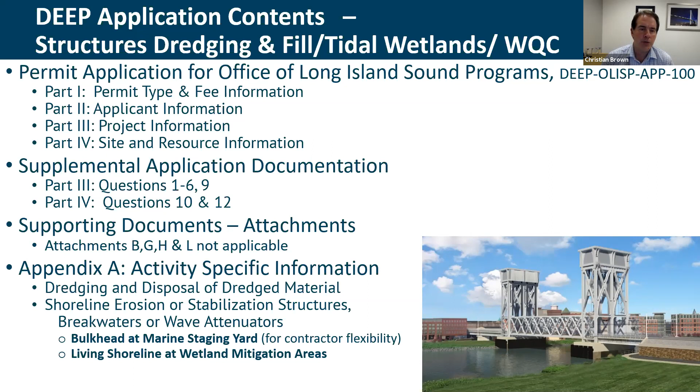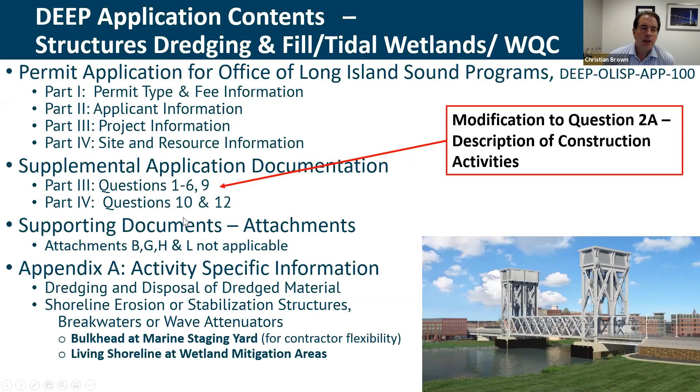What we're going to focus on tonight really is in this area here. That's where the primary adjustment to the application is made, in what we call the narrative, where we describe the nature of the work, durations, the type of construction work that goes on in order to build the new Walk Bridge. So within that part of the application, we are modifying primarily question 2A, and that's the description of the construction activities. So it's been a while since we've seen some of the specific construction activities, but if you remember from previous discussions, we broke the project down into what we call construction activities. And the construction activities describe those discrete operations that take place in order to build the new bridge and remove the existing bridge.

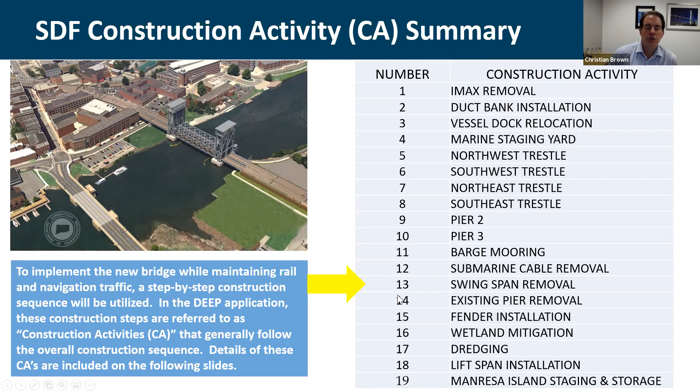What we also wanted to do within the application was to provide some additional clarity to some definitions and terms that we were using to define work that gets conducted within the waterway and within the navigation channel. And probably the best way to describe that is if we just walk through each one of those scenarios so that everybody has a clear understanding of what those definitions represent. So if we take a look at the existing bridge in this schematic here, looking to the north, when the swing span is in the closed position, there are 2 navigation channels that are provided. There's about 16 feet of vertical clearance above mean high water, and low clearance vessels can go through either side.

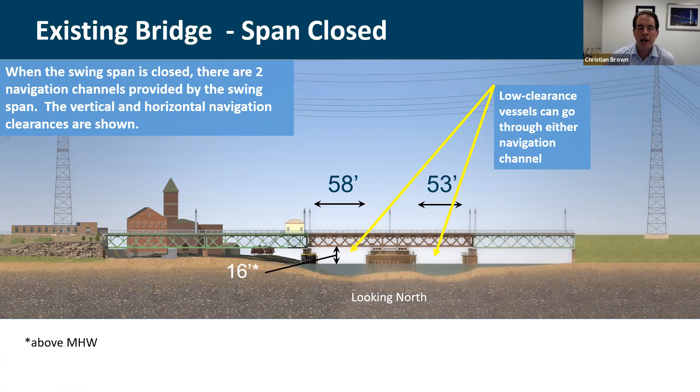You know, that includes small motorized craft, rowers, et cetera, that could pass beneath the bridge when the span is in the closed position. And then when the span's in the open position, as you see here, the navigation channels open up on either side. We still have 2 navigation channels, and now that vertical height restriction goes away, and that allows for taller height vessels to pass through.

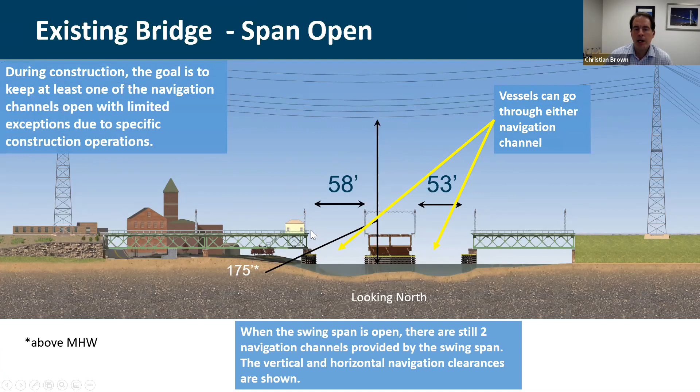Okay, so when work starts to advance for construction of the new bridge, one of the goals of the project is to maintain both rail traffic and waterway traffic to the greatest extent possible. And throughout the course of construction, there may be periods of time where we have to conduct activity within portions of the waterway that may impact one side of the pivot pier, okay? But again, that goal is to keep the navigation channel, at least one of them, open to the greatest extent possible.

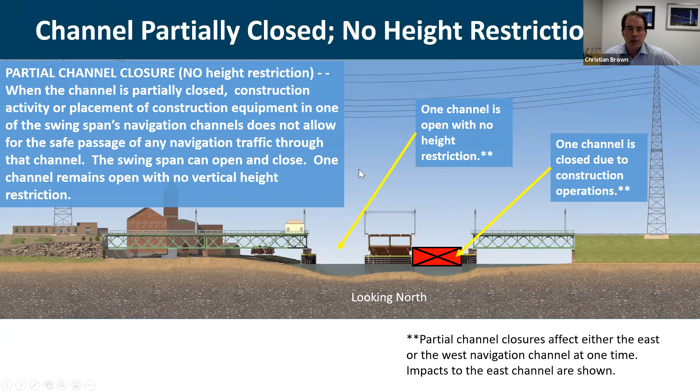And then finally, our last definition of how we are characterizing the navigation channel is when the channel is fully closed. Again, the goal is to have the channel open as much as possible. And there are identified instances where the channel has to be closed, where no vessels can pass. That's because there's a construction operation going on that poses a certain risk to the waterway users. Safety obviously is our number one priority, so we don't want to compromise that.

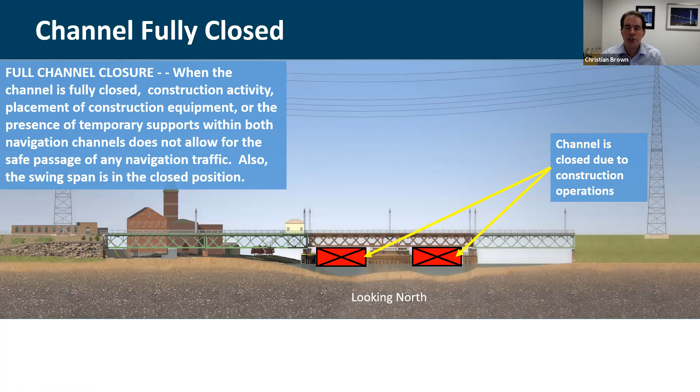Or there may be just a physical blockage of the channel from construction activity, construction equipment. There may be some temporary supports placed in the waterway as well. And so the channel would be closed in this instance. So that's the channel fully closed. So we've got channel fully open, the partial closure, and the full closure. Those are the definitions that we are working with.

And then to demonstrate that, we can use one of the construction activities where we build the piers. That's construction activities 9 and 10. We've got the piers on either side of the navigation channel. They're placed, if you remember, outside of the navigation channel, and it allows the swing span to remain operable during most of the early portions of construction.

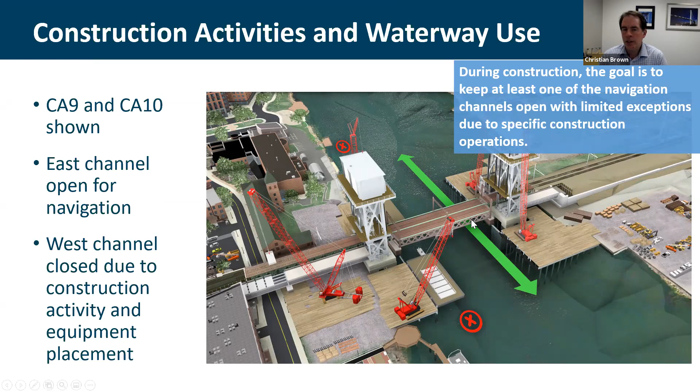So let's now get to construction activity number 13, and that is the existing swing span removal. You've probably heard us talk before about how wonderful that existing old swing span is, where it carries all 4 tracks, and it was really an engineering achievement more than 100 years ago.

Obviously they may not have been thinking about removing that span, because for the Walk Bridge project, that really complicates things. So as great as it has been over time, that 4 tracks being supported by a single structure really makes things challenging for us to progress the construction.

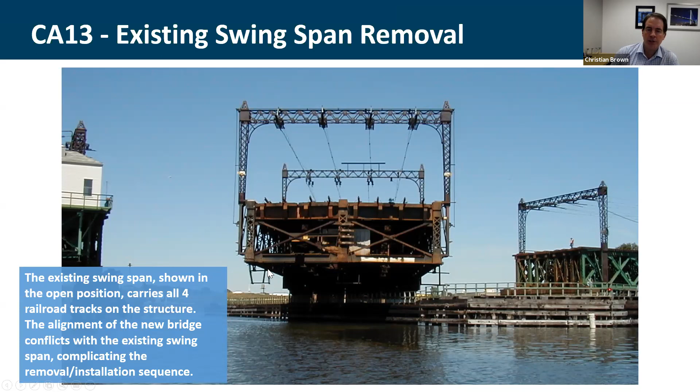If you take a look at the layout of the existing bridge, what makes it most challenging is that the layout of the new bridge is such that there's a physical conflict with the existing swing span and the new lift span to the south. So what we're doing here is looking to the east. This represents the existing pivot pier.

This represents the existing swing span. If we weren't to do anything with the existing swing span, you can see there's this overlap with the new south lift span truss. We can't change the track any more than what we have in order to meet design requirements and criteria. So we're faced with this conflict.

In the DEEP application, what we have is the presentation of two schemes that will provide contractor flexibility during construction to remove that existing swing span and to allow the new lift span to be installed.

So in scheme 1, under construction activity number 13, this is really the heart of the updates that are being finalized in the DEEP application that differ from what was filed back in early March.

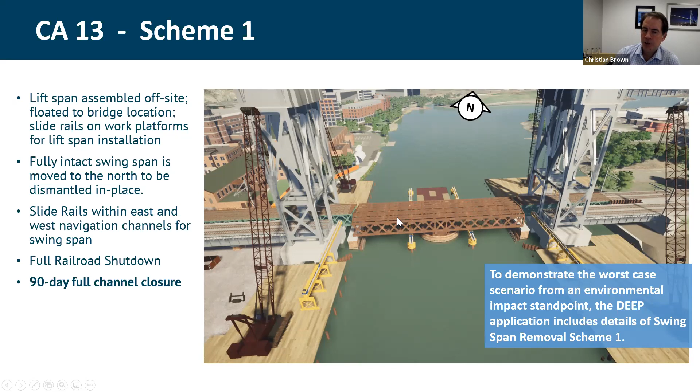So there's two things going on with this. It has a full railroad closure, and it also has a 90-day full channel closure, meaning that with the presence of these slide rails and the removal of the swing span from its current location, the channel gets closed for 90 days. That's scheme 1, as described in the updated DEEP application.

These next series of views just provide a little bit different perspective of how those slide rails appear. So we have the system within the waterway. We're closing the channel for 90 days while we're installing these slide rails, moving the swing span to the north, then removing the swing span from the site, and then pulling out the slide rails.

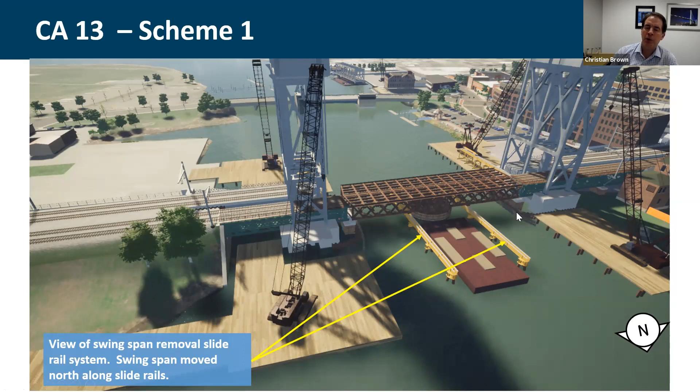That encompasses that 90-day time period. And here's the last perspective of scheme 1 with the temporary slide rail system.

How long will the railroad be closed for? The railroad will be closed for a minimum of 96 hours.

We're working through that now as it relates to better understanding what the overall testing requirements are going to be for Metro North in order to reopen the southern two tracks. But 96 hours is what we currently have, and there's a lot of risk with that operation. You're saying 90 days. On what timeline is it 90 days based on a year, 12 months? What months are you looking at?

Right, so that's a great question. Through our consultation with waterway users and other agencies, this work is planned to be performed. Overall, there's a window from November to April that this type of work could be planned. The intention is to actually conduct that 90-day period right in the middle of that, so in the December, January and February timeframe, where a lot of the recreational traffic is at a minimum, making accommodations for the commercial waterway users in this area as well. Their traffic tends to drop off compared to the rest of the calendar year, so we're really dedicated to completing this work during those winter months.

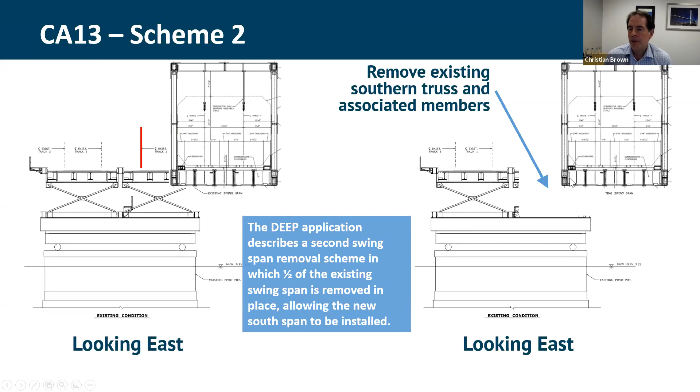So again, this is what that would look like. Over on the left-hand side, you see the conflict over here. And now when we remove part of that swing span, we got that physical space needed to install the lift span. So just like in scheme one, the new lift span is pre-assembled, it's built off-site and then floated into position. The south half of the existing swing span is removed in place.

So what we see in this diagram here is kind of a portion of that removal in place, right? So we'll be working on both sides of the channel in order to remove this. There are no temporary supports, no piles driven in the waterway, so no impacts to the river bottom during this work. It's all done above the mud line.

It allows for a continuous two-track operation. So on the north half of the bridge, those tracks are already in service, they're going to remain in service. I mentioned no temporary works in the waterway.

What happens when this operation commences is that the swing span is no longer operable now, so we essentially have a fixed bridge in a temporary condition. That temporary condition right now is scheduled for a 180-day period.

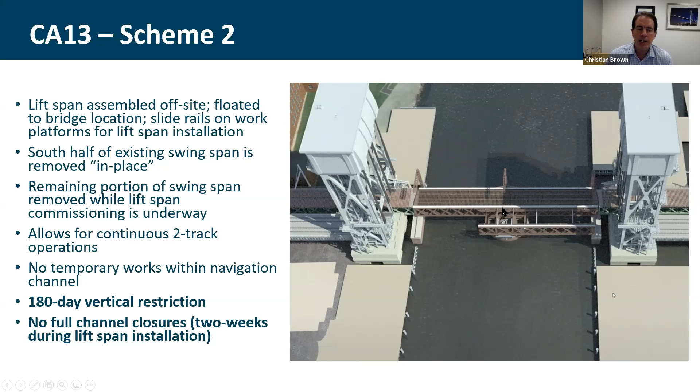So there is no blockage of the channel, so there's no full closure of the channel. We'll have partial channel closures. If you remember, the partial channel closure is when you can use one side of the bridge versus the other. Unlike in scheme one, where the channel is fully closed for 90 days, we have no full channel closures with this option, and we have no piles in the river itself, but we do have that 180-day vertical restriction.

So in this video here, I'm going to move it along a little bit just because it takes a little time to get to a point where we actually see stuff happening. As I mentioned, that work will be performed on one side of the navigation channel at a time, keeping the other side open, and we'll step through this a little bit so you can see how some of that work progresses.

And now we flipped over, now we flipped over to... well, whoops, I hit the wrong key, sorry about that.

Move this along. So now we're over on the west side open—I'm sorry, the east side is open. And now in this view, that gets back to that point about the alternating navigation channels that remain open.

Within the permit application, you'll also see reference to the fact that scheme 2 for the swing span removal is the department's preferred alternative. So the idea is that we're presenting both schemes in order to have approval and authorization to complete both of them, with the department's goal being to implement scheme number 2.

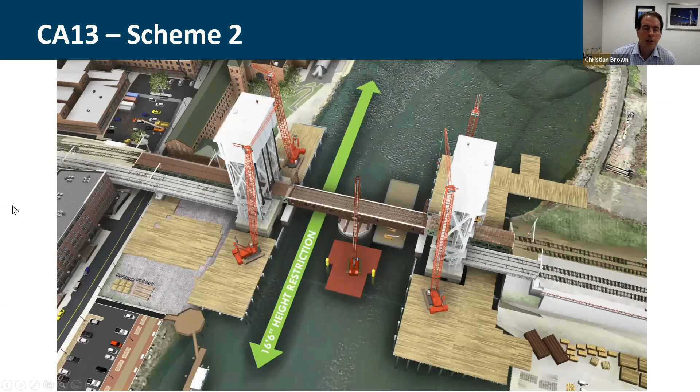That represents the primary update to the DEEP application. In terms of schedule, if we bridge the time from November 1st through April as that window when this work would happen, we met with upstream waterway users a couple weeks ago and presented this to get their feedback, and it was generally acknowledged that they could accommodate that off-peak time. It's a one-time occurrence within the project, and it's currently scheduled within the 4th year of the project.

So there's going to be a lot of communication, a lot of planning, understanding exactly when this is going to happen, close coordination with all stakeholders to ensure everyone is kept up to date and aware of the construction activity taking place—when one channel will be open, when the other channel will be closed, et cetera. So that's the overall schedule for the swing span removal.

Just to recap: scheme 1 has piles driven within the navigation channel, and those piles get extracted when the operation is completed. It has a 90-day full channel closure and full closure of rail service. Scheme number 2 has no full channel closure, except for the period when we actually have to install the lift span itself, but the swing span removal has no full channel closure. It has no railroad closure, and no piles installed within the waterway.

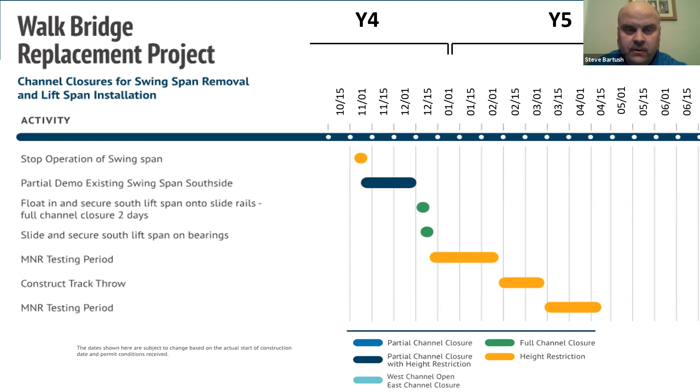Maybe one or two more from me. So it was mentioned in Harbor that there was going to be a low headroom tug used perhaps to transfer, I assume, private company materials. Can you guys talk about the logistics of that? Where's that come from? Who pays for it?

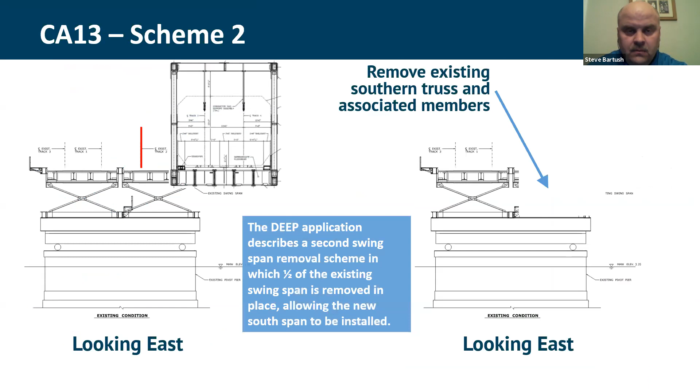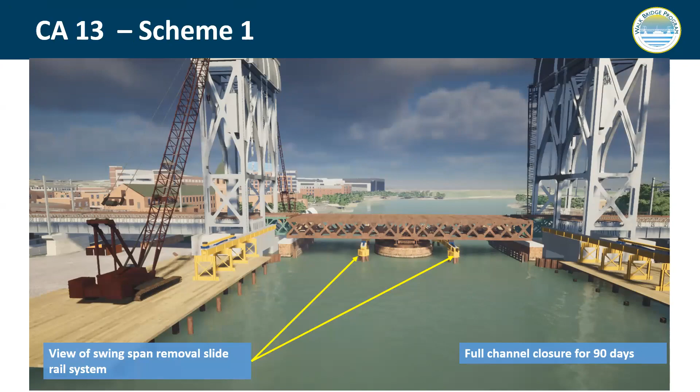Yeah, Rich, do you want to talk? I could talk a little bit. So just like it will be provided by the program. The handoff would be south of the Stroffolino Bridge, and the low headroom tug would push the barge all the way up to Devine Brothers, I believe is where they'd be going.

If there's another barge delivery to a different facility, it would be the same thing. They would hand off below the Stroffolino. Now this only occurs when the bridge is locked in position that one winter season. Other than that, the low headroom tug wouldn't be used. The contractor will still also have a low headroom tug on site as he's moving around barges that he needs to use to build the bridge, so that allows him to move his barges without having to worry about the bridge being open.

Thanks. I don't mean to be facetious, but when the low headroom tug is not in use, someone may want to cover it with camouflage netting. We have members of our community that think that might be the solution that would obviate the construction of the bridge in general. That doesn't help with the sailboats, Steve.

Are you still gonna use Donardo's property? Yes, John, you want to answer that one? Yes, we are, that's our staging area.

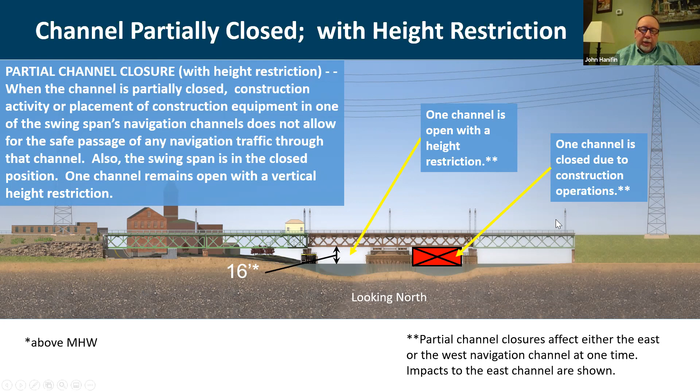And then the other question - I think at one point you talked about needing to moor or anchor work barges in the harbor or outer part of the harbor. Is that still part of your application? Yes, it is. We have the locations - do you remember the exact locations, Chris? We thought that if you use Manresa Island, that may be an opportunity to use the old barge terminal there instead of having to anchor or moor large barges in the harbor, but I don't recall that now.

I think the idea with the use of Manresa Island is that it has a specific construction purpose that's planned. It's already scheduled to be occupied, if you will, by construction barges where the lift spans will be assembled.

And then the other thing - you don't need any city land use approvals to use Manresa Island, you just need approval from the owner, and that's what you're working on now to come up with an agreement with NRG. We've gone through the public process. We'll submit our applications as part of our permit packages, and then our right-of-way unit will negotiate with the property owner.

So that's still in the works then. Yeah, until we get our permits submitted and approved, everything is waiting out there for approval. That's why we really want to get the applications in. We really want to get into construction because every day we wait is a delay, and delay costs, so we want to get the construction started as soon as possible.

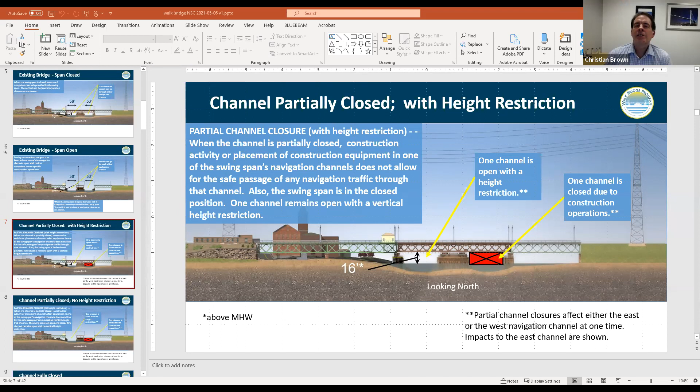Anybody else have any more questions? Thanks, John and Chris. Thank you, guys. We'll move on now. Thank you for giving us a breakdown. Have a good evening. Enjoy your night, guys. Thank you, thanks, bye. All right, treasurer's report.

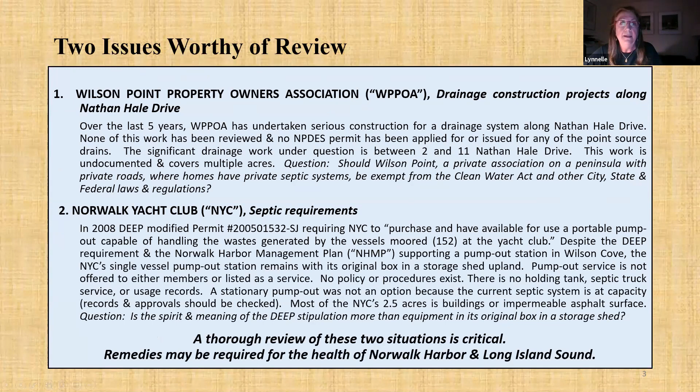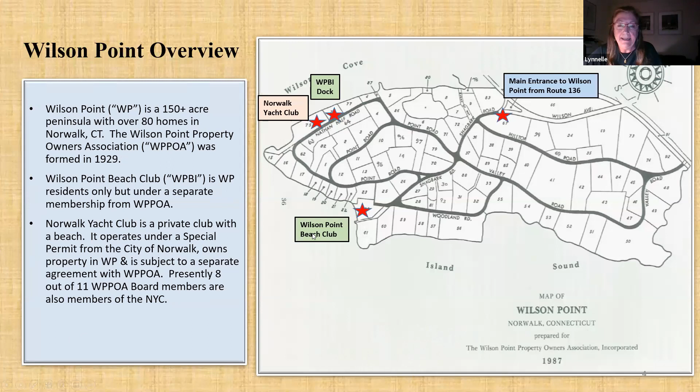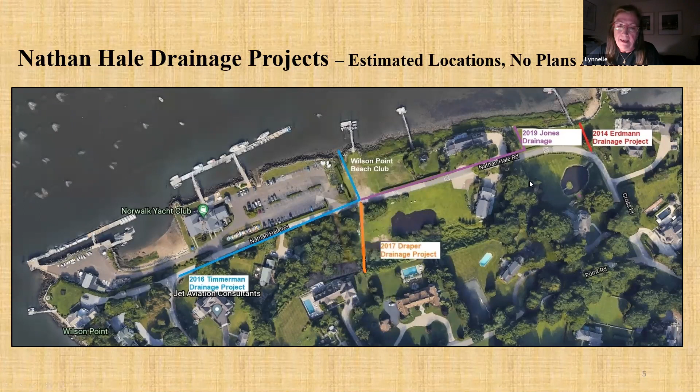This is an overview of Wilson Point showing the location of the Yacht Club on Nathan Hale, at 10 Nathan Hale Drive. There have been 4 major drainage projects on Nathan Hale Drive. First, in red, are the new point source drainage pipes placed in 2014 in front of the Erdmann property. Second, in blue, is the Timmerman project, which laid 450-plus feet of new pipe to drain through the Wilson Point Beach Club. Third, in orange, is the Draper project, which laid pipe tied to the drainage from Point Road lawns on the hill to pipes laid in the 2016 Timmerman project out to the sound. Fourth, in purple, is the Jones project - not me, but Lori Jones, a member of the Harbor Commission.

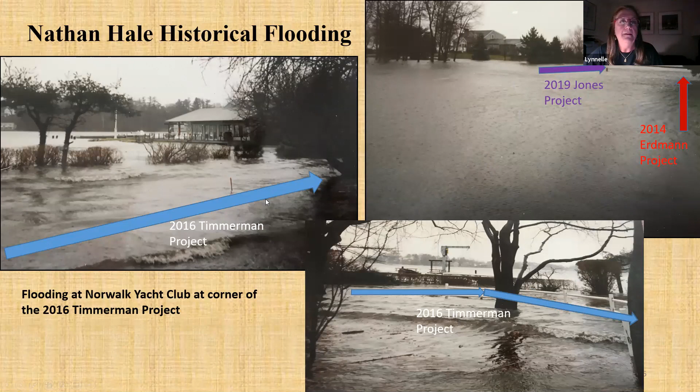And this is a drainage from the road and the lawns across the street along our property line. Another non-documented drain never reviewed. All of Nathan Hale, including the Yacht Club, is highly prone to flooding. You can see this is Lori's house right here, the Timmerman project here, all Nathan Hale Road.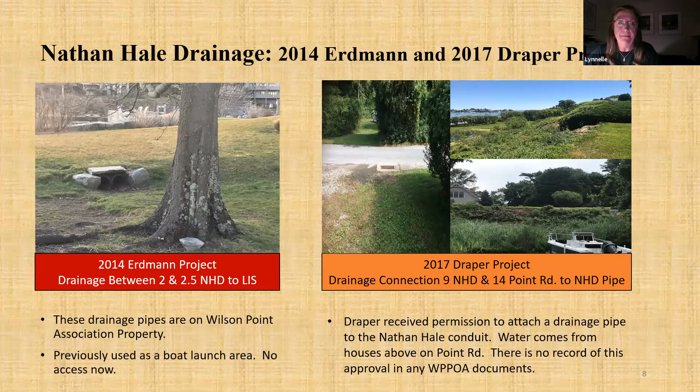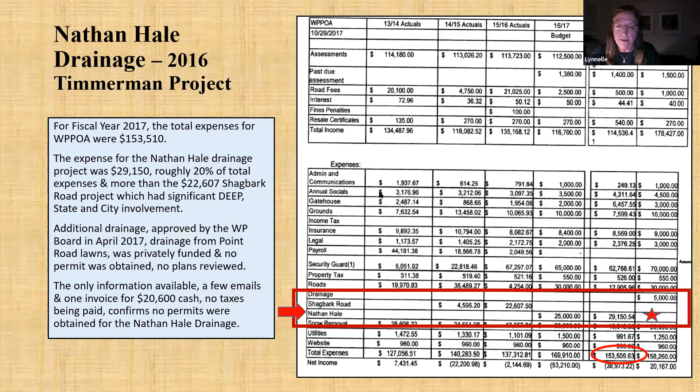Here are excerpts from Wilson Point meetings outlining the scope of the 2016 Timmerman project. This project cost more than another Wilson Point drainage project, the Shagbark project, which involved DEEP, the city, and other permitting authorities. Oh, sorry. I made numerous requests to the Wilson Point board to review the plans and documents for the 2016 Timmerman project. When I was given 5 emails and told that was it, I made a request through the Freedom of Information Commission.

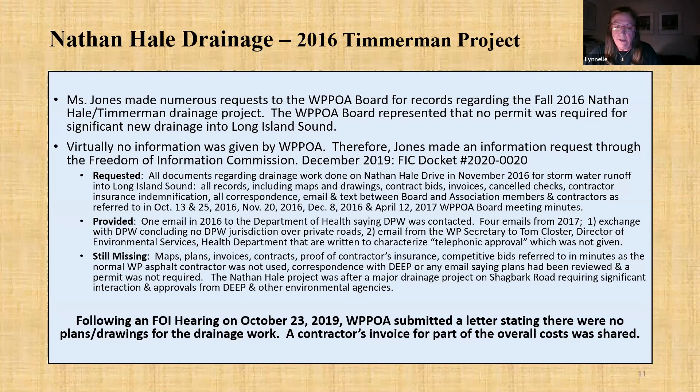Following the FOI hearing where everyone was under oath, I was given an invoice for part of the work. Here, you can see 3 of the emails given to me to prove no permit was required. As you can see, they are nothing but self-affirmation notes. Christian Nagle, who was president of the association at the time, is a partner at a major Wall Street firm specializing in SEC disclosure. Here are 2 more of Christian's self-affirmation emails. Note the dates and my email exchange with Tom Closter.

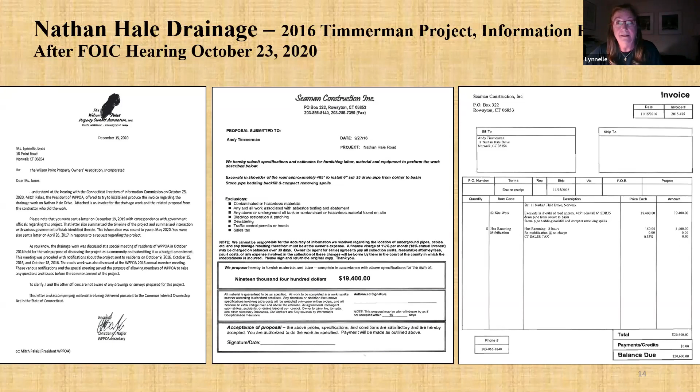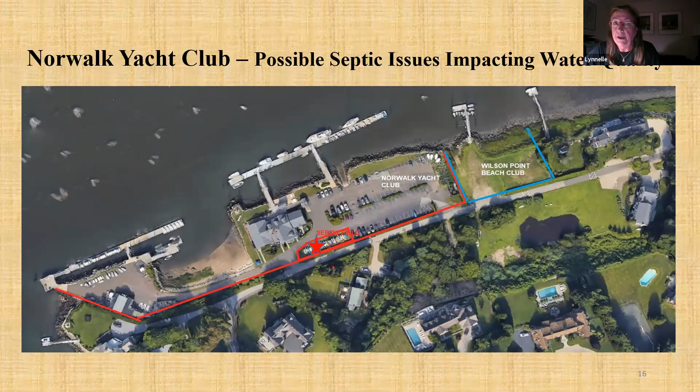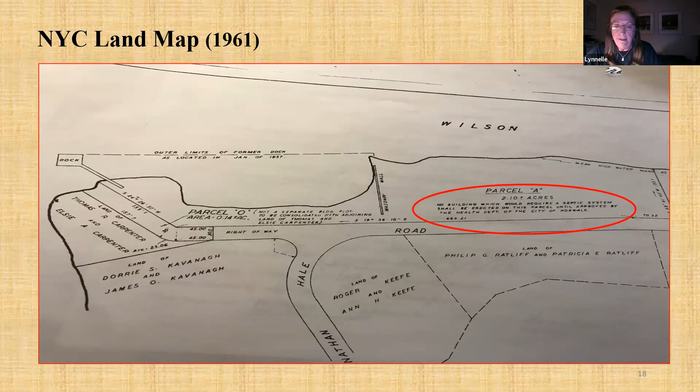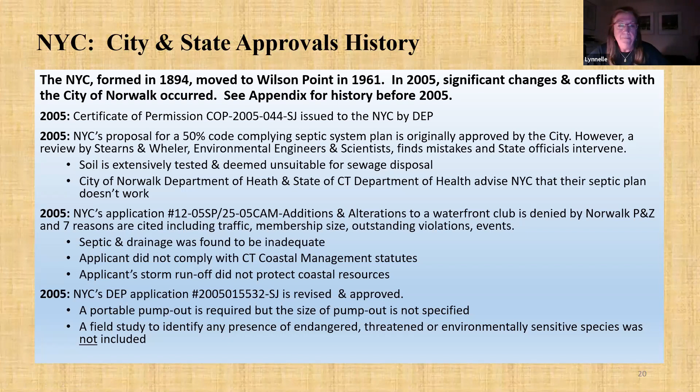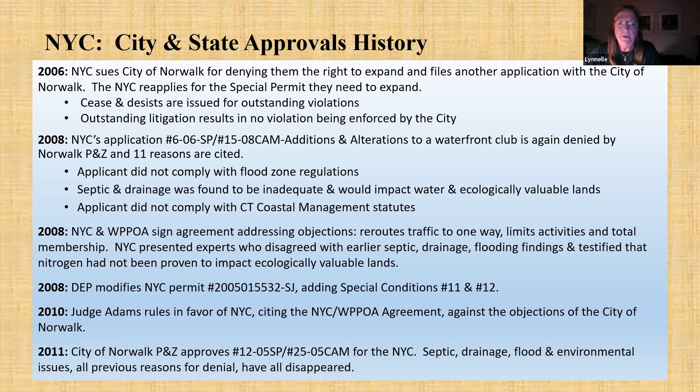Wilson Point had hired their own expert, Stearns and Wheler, but the board of the association at the time, mostly members of the yacht club, ignored the report and gave the yacht club what they needed for this judge, an agreement about everything but environmental and septic concerns. After all, the Norwalk Yacht Club had an expert that testified it had not been proven nitrogen harmed anything. In both 2005 and 2008, P&Z denied the yacht club their permits for extension. You can see the reasons, most of the ones highlighted here, and 4 of the reasons here: environmental, septic, drainage, flood. But following the judge's decision, there's nothing that P&Z could do.

These are excerpts from the engineering report Wilson Point commissioned in 2005, and the report has been shared with your commission. When Wilson Point commissioned this report, the board just wanted to know the facts, but they didn't like what they read, so they ignored it.

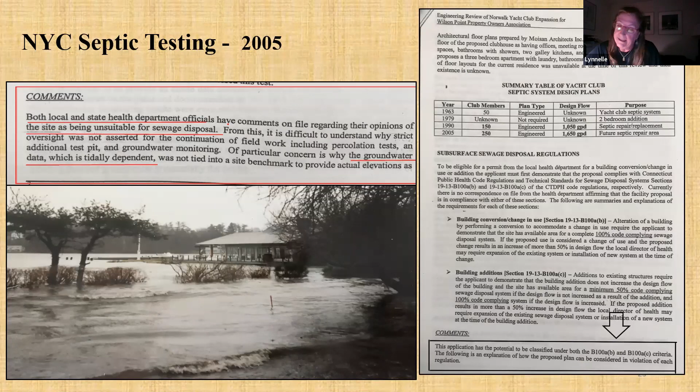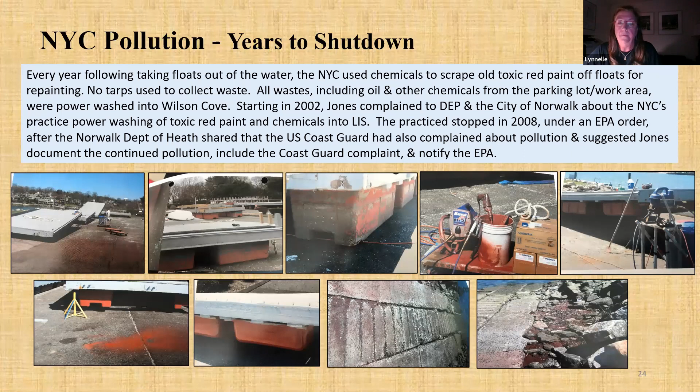Reporting pollution is not easy, but in this case, with the Coast Guard report, I got the attention of the EPA. I thank the City of Norwalk Department of Health for always taking my calls and sharing information. Please don't tell me this club cares about the environment. They knew exactly what they were doing, denied it, and started again. The Coast Guard tracked the red paint pollution from the Norwalk River to the yacht club.

This is a permit that the yacht club has right now, and special conditions 11 and 12 seem clear to me. If the portable pump out is not available for use this season, listed as a member service, if this year there is no holding tank to store waste, no septic truck service, as explained by the general manager last fall, I will continue to file complaints and hope that you join me.

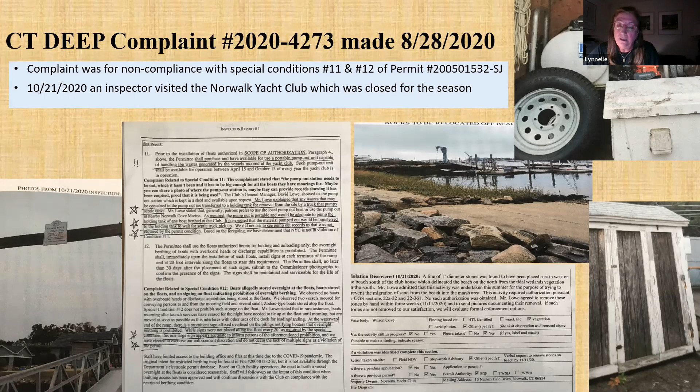I have no idea why condition 12 was changed. Did the shellfish, the reason for condition 12 in the first place, move? The environmental violation found shows the club is either clueless about environmental laws or they just don't care. These are my outstanding questions for the conditions at the Norwalk Yacht Club. I'm sure following reading and reviewing this, you will have your own.

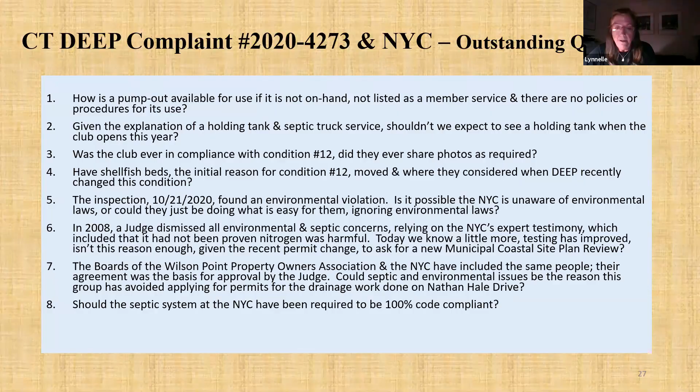Strategically important, not just to Norwalk, but to Long Island Sound and the Connecticut coast. My appendix includes the early history, as well as all the documents I can make available for anyone. Thank you. Stop share. Thank you. That's a lot of work. A lot of work. Thank you for getting a copy of the permit and reading it. Thank you. I know it's just one voice, but.

Where do you live in Wilson Point? I'm at 10 Point Road, so I am right above and I have a view of everything that goes on, Nathan Hale, as well as the yacht club. It's not that I'm against the yacht club, sir. I think actually, when we had all this and I questioned it, I think it was good for everyone.

How many people on Wilson Point belong to that yacht club? I couldn't tell you, but certainly 8 out of 10 people, 8 out of 11 on the board. And the rest are out of towners? A lot of out-of-towners. There's been recently a lot of turnover. We didn't used to have a lot of turnover, but now we do.

I will say that at our last meeting, the president mentioned, and I'm sure this was after his conversation with Joe, that the common practice of taking the biodegradable blue poop bags and throwing them down our drains might not be a good idea. And people said, well, they're biodegradable. We definitely need some education. People move out here, they don't even know they're on septics. We had homes that were draining directly into the sound. You can always get somebody willing to work for cash and no permit.